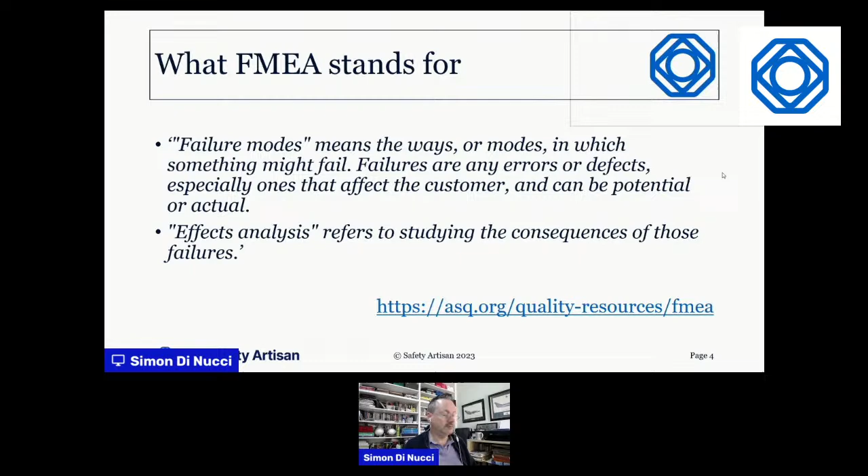So who invented it? Well, FMEA was invented by the US military, as far back as the 1940s - we have a reference for that. And it was a reliability evaluation technique. So as the name implies, it's focused on failures, which is good in some ways, but of course it has its limitations, and we'll talk about those later.

And as it says, it was one of the first systematic techniques. I've got this quote from the ASEMS toolkit from the UK MOD, and I've got a PDF of that, which you can go and look in the toolkit. There's lots of good stuff in there for free, but I've got a PDF download for you as well, which I'll share with everyone who's attended. I'll email that to you after the event.

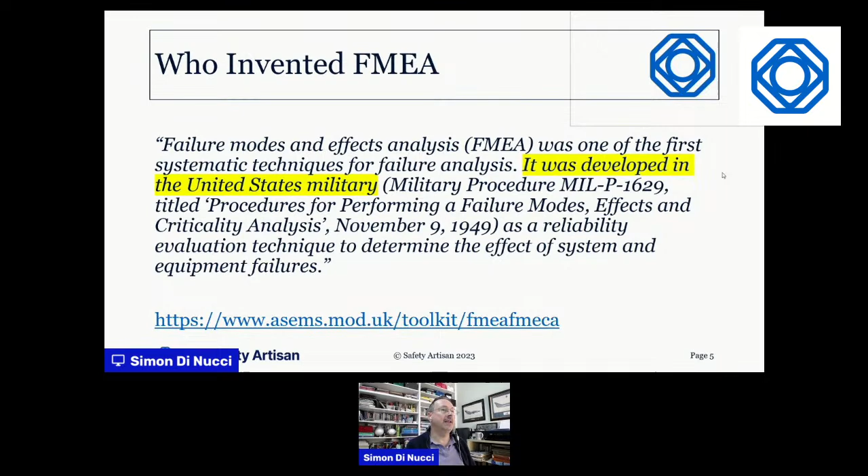So what can FMEA be used for? So as I've said already, we can use it for looking at how do we get rid of process failures or product failures - or not necessarily how do we get rid of them, but maybe how do we mitigate them or prevent them from becoming an undesirable event. So we recognize we're never going to have perfect reliability. Some failures are inevitable, but maybe we can design or architect the system so that as few of those failures as possible actually become significant, as in interrupting the operation or the mission, or causing a safety problem. And as a safety engineer, I'm particularly interested in that.

And as it says, again this is a quote, FMEA is effective for both. We can apply it to an old system - maybe we've got an existing system and we've had some unexpected failures or unexpected problems, and we want to understand why that's happening. Or we're using it for a new system in development. We'll talk about that more in a moment.

As it says, for new processes, it can identify not just failures, but usability problems, potential bottlenecks, or unintended consequences. This quote was actually taken from a medical-focused publication, because FMEA seems to have been adopted by the medical profession quite widely. It seems to be very, very popular. So it's being very widely used.

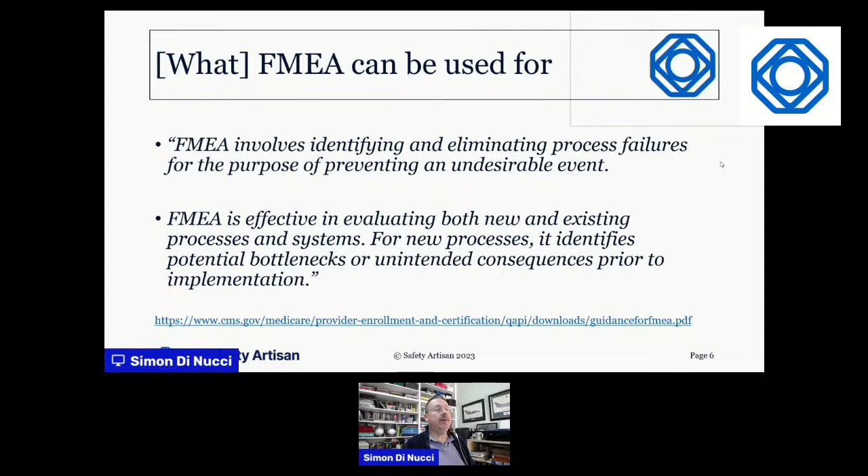So when should we apply FMEA? Here's an example in the green cloud over on the right-hand side of the V. This is taken from ARP 4754A, which is an aviation safety standard.

And here they are suggesting that we can use FMEA or FMES. FMES is a failure modes effects summary. FMES is a variation on a FMEA for a very complex system like an aeroplane.

On a commercial aeroplane, or an airline or something like that, we're going to have tens of thousands of components. So our FMEAs on each system or subsystem could easily run to hundreds of pages. Generating and reviewing a FMEA of hundreds of pages is tedious, as you would expect. So very often when we have such voluminous results, we'll have the raw results, and then boil them down.

Maybe to a summary that does some trend analysis and pulls together only the significant failures above a certain threshold that we're interested in, or maybe failures within a safety critical functional chain, something like that. That's the purpose of a FMES, in order to make the information more manageable, because the sheer volume is a problem with FMEA.

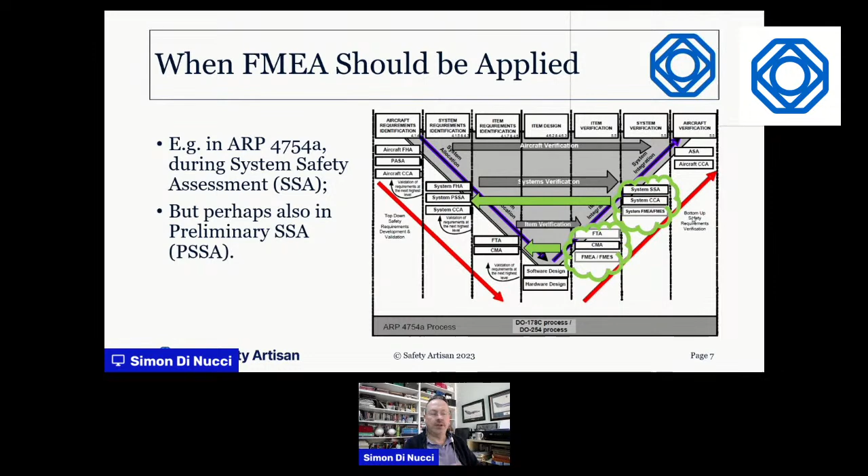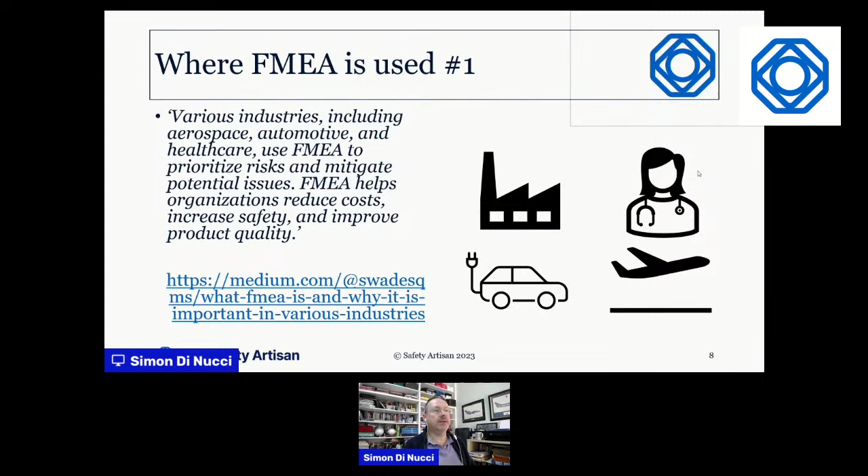So where FMEA is used, and I've got a number 1 on this because there's two meanings to this question in my view. So in terms of where it's used in industry, all over the place. As we've seen, there's lots of benefits for FMEA, and it's used in automotive, healthcare, aviation, basically anywhere where the consequences of failure can be unpleasant for people, harmful to people, or expensive. So anywhere where it's worth spending a little bit of money to understand what our failure modes are and what to do about them.

The other meaning of where I think that is helpful is what do we do with the data? Specifically here, what do we do with the results of an FMEA in a system safety program? Typically we would use the FMEA to directly do the analysis to help us come up with hazards and controls. We can just take the tabulated data and identify hazards and failure modes that need to be managed, therefore we've identified some hazard controls. That's fantastic, we can do that.

We can also use it as just one component of a wider system safety program. In this case, on the illustration on the left, we might use the FMEA to generate the data that goes in at the bottom end of a fault tree analysis. We're generating all of these failure modes, and then putting them together in order to see how they might combine to lead to a top event. The top event might be an overall system failure, or it might be a hazard, depending on whether we're looking at reliability or safety. So we would use the FMEA generated data to feed our fault tree, and indeed to help us construct our fault tree.

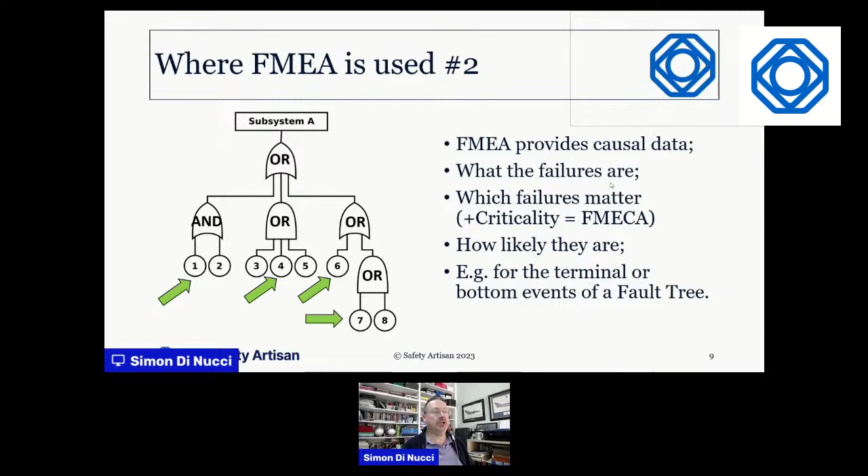So why is FMEA important? I think we probably covered this already, we've talked about the benefits. In fact you've seen this quote a few slides back. There are lots of benefits potentially from using FMEA. It's quite a simple analysis, basically, and it's quite easy to understand. It's widely used and understood. You get some nice tabular output that is relatively easy to understand and review. So there's lots and lots of benefits, and it can do significant things for us.

On the right-hand side here on the slide, we've got a slight variation. Some forms of FMEA, you can come up with what's called an RPN, where we can prioritize these failure modes and score them on severity, how likely they are to occur or how frequently they occur, and can we detect them or not, can we do anything about them? Clearly, if we've got a failure mode that could have a severe outcome, if it happens often and it's difficult to detect, well that's really bad news, and we need to prioritize that and look at that in far more depth. So something like an RPN gives us a consistent scoring system in order to prioritize things.

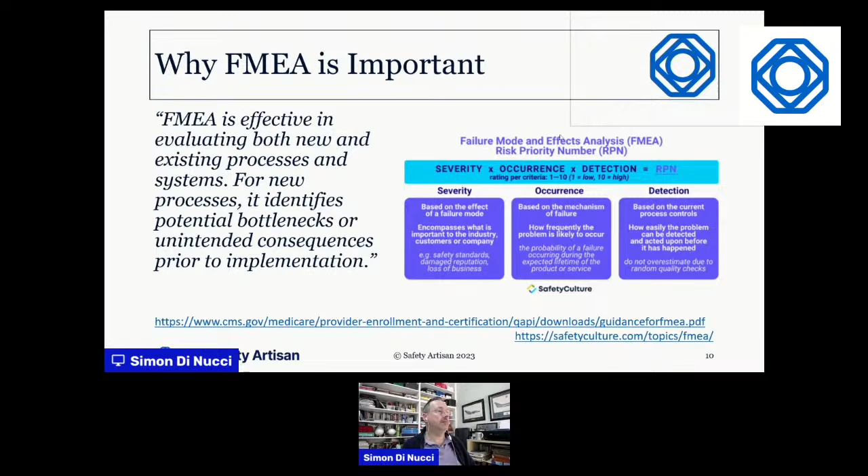So, FMEA tools. Basically I went on the web and looked up some that seem to be very popular and recommended by different people. I have not used these tools, so I'm not making a recommendation. I'm just pointing out there are a lot of tools out there.

Significant, I think, to say: there's lots of variations in FMEA. Think about what you're trying to achieve and therefore what kind of FMEA, FMECA, or FFA you want to do, and then see whether the tool meets your requirements. So lots of decisions to be made about what kind of FMEA you will do, at what level, how much detail you want to go into, or maybe you have to because the regulator says you do.

So maybe the regulator has made some of those decisions for you, but for most of us, we actually need to think about what we're going to do and pick a tool that supports our chosen process. So the tool really is the last choice.

Now, what I would say on making all of these decisions: there are lots and lots of very good free guides and templates out there for different kinds of FMEA. We'll see an example in a minute. I've chosen quite a simple one. There's a slightly more sophisticated example in the PDF handout, but there's lots of other stuff out there, and if you follow some of the links I've provided, you'll see them.

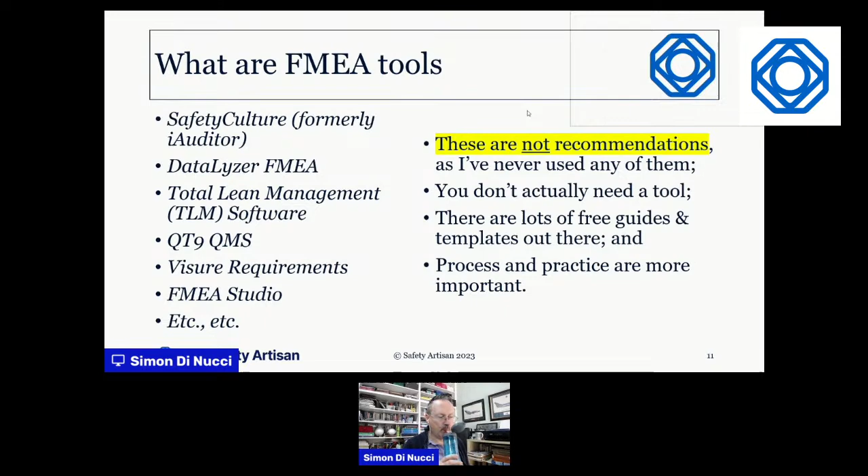Okay, so those were all the topics I wanted to cover.

In order to go through that stuff, I've been on these sites, quality sites, Medicare, Safety Culture. There's lots of good information there. As you'll see, for example, on the third one down, there's a guidance PDF on that site at the cms.gov site. So that's good.

I'm also going to be emailing you the PDF for the ASEMS Toolkit Guide, so if you prefer to read information in that format, I will send that to you. It's also got some further links to standards, so if you want to follow a particular standard, there are some examples there. There's lots out there, different industries apply different standards, so it's just a short list, not exhaustive.

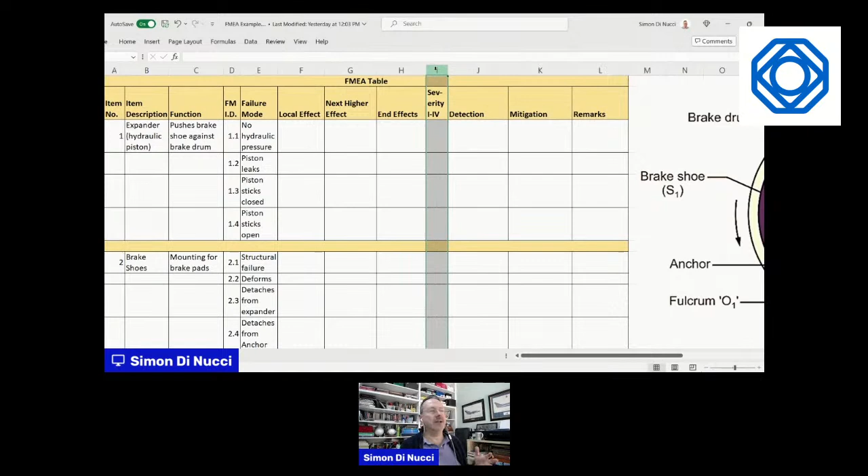Now, strictly speaking, this is actually a FMECA table, because on this table we can assign a severity, and in this case severity 1 is we could hurt somebody, or it's critical or catastrophic, and severity 4 is no effect whatsoever. Okay, I'm not going to bother filling that in. Well, we might do. We'll see how we go.

And then we've got some additional columns here. So in fact, we could do an FMEA with just columns A to F. Okay, that would be a very, very simple FMEA. And then we are maybe adding the criticality considerations here in columns G to I. And then finally, when we talk about detection and mitigation, we are anticipating some controls here.

Either from a perspective of reliability or safety - I'm going to focus on safety. And then remarks, maybe we're going to put some amplifying remarks in there. Or if we've got a bunch of people, we might allocate an action to an individual in that column. So there is our table, and I've got just a couple of examples.

So what we're looking at, and it is a very simple example, quite deliberately. Now, why is that? I don't know if you're seeing a hole in your diagram as I am. I don't know why that's happened. Never mind. So here we've got a very old-fashioned drum brake, and for those of you who aren't as old as I am, a drum brake is an old-fashioned braking system. Almost everybody uses discs these days, except on bicycles. Well, even they use discs.

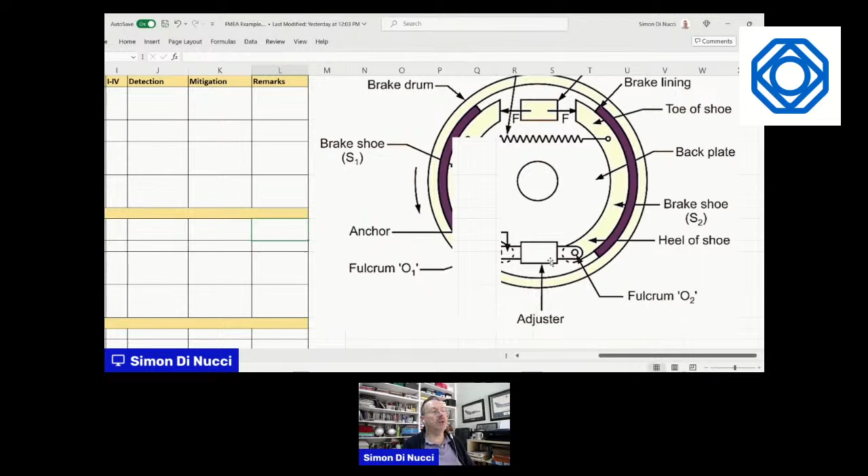So that decelerates the car. By squeezing the brake shoes and the brake linings onto the drum, we get friction and we get deceleration. Okay, so the shoes are forced apart by the expander at the top. The shoes pivot at the bottom on the fulcrum there, which we can adjust. So if we've got brake wear, we can adjust the shoes to make sure that they make good contact. Okay, so there's an anchorage point down here.

That is basically a brake drum. It's very simple. And then finally, the retractor spring. When we release the pressure on the brake shoe, when the piston contracts again, the return spring just makes sure that the shoes come off the brake drum and the braking effect ceases. And that is basically the operation of a brake.

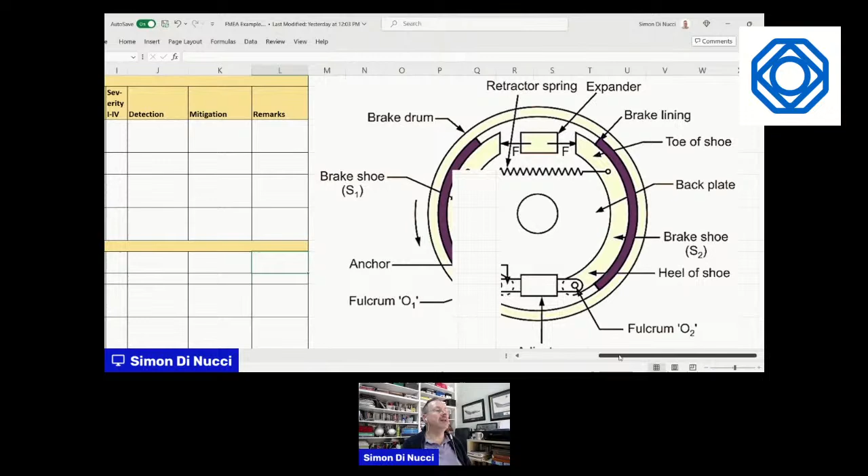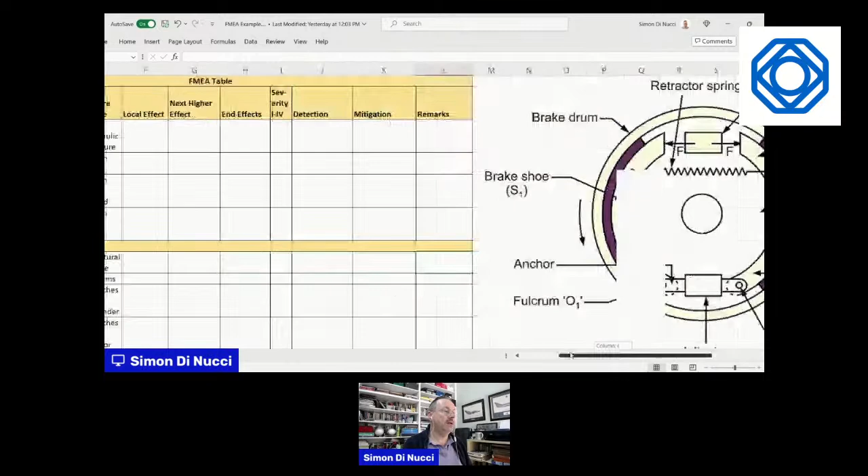So I'm going to go through this in front of you. Okay, so first of all, we've got our expander, our hydraulic piston up here. So what happens if - the function of it is to push the brake shoe against the brake drum. So our first failure mode is no hydraulic pressure. So we're not getting any pressure to the expander. So the immediate effect would be...

No expansion. Oops - this is where you discover that I can't spell or add up while people are looking at me. So no expansion, let's say, of brake shoes. So actually, maybe just say no movement.

Okay, so by the way, it's perfectly normal as we go through this stuff - the reason I'm doing this live, I haven't, as you'll see, rehearsed this particularly well. It's okay to make mistakes. It's okay to go through, and then sometimes you'll get partway through and you'll suddenly think, oh, I've misdescribed the function, or I've got the failure mode slightly wrong. So as you go through this, you will refine your assumptions, okay? And you realize you hadn't understood things as precisely as you could.

So no movement of brake shoes means no pressure against brake drum.

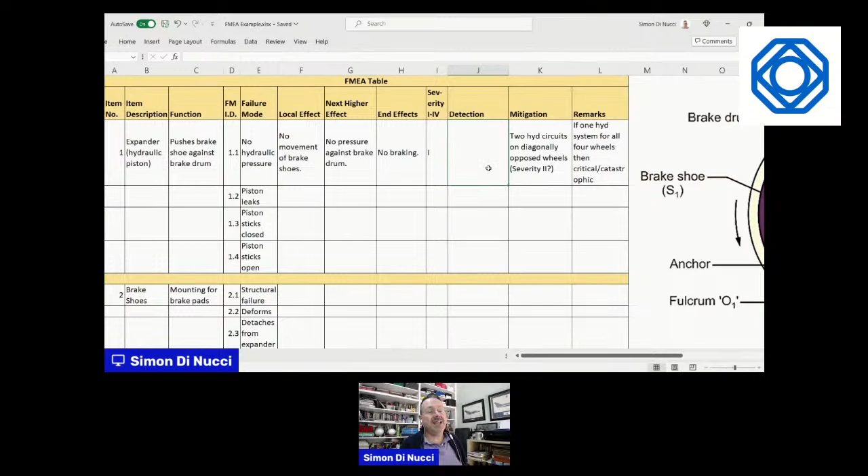And what's the detection? Okay, so maybe if we've got a pressure sensor in the hydraulic circuit, it triggers a warning light to the driver saying your brakes have failed, or half your brakes have failed. Okay, so there we go - there's just one line, and we've actually not only looked at the failure, we've come up with some really useful information. I know it's a very simple example and it's very old tech.

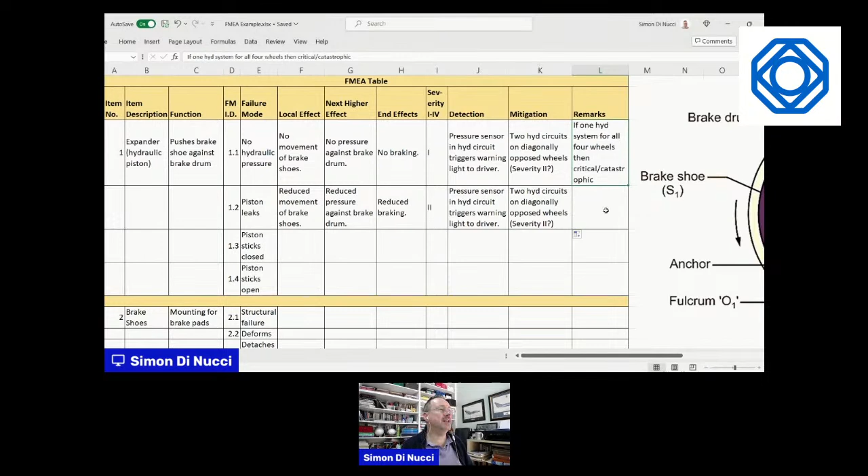Again, if we've got two circuits, okay, maybe that remarks thing from the 'no' isn't as relevant, but it might be. So we're beginning to see here already how repetitive these things can be, which makes it easier to fill in the table quickly. But of course, if we go too quickly, then we can make mistakes, particularly when you're talking about huge tables of data, which maybe you've worked on over a long period of time.

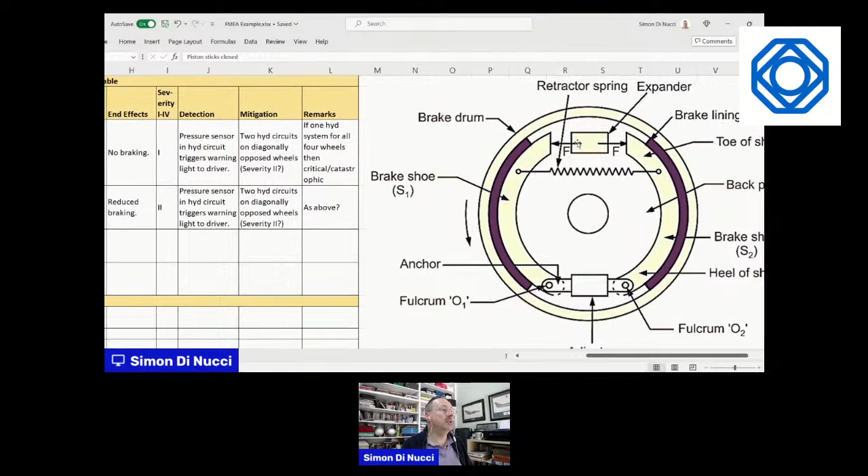Piston sticks closed. Okay, so that means that the piston, the expander, is not going to move at all - it's not going to expand the brakes, which means no braking. Okay, so let's just copy all of that for now, because we've got no braking at all.

So let's just check this - no movement against brake, no pressure against brake drum, no braking. Okay, agreed, category 1. Now, hold on, but it's only one piston.

If it's just one failure, we've still got - so one piston per wheel. So there's an assumption there that I'm making. So we've still got 3 out of 4 brakes working. Although we are going to get a bit of swerving though, aren't we?

So maybe that is category 2 again. So, yes, swerving while braking - we might have that. So pressure sensor isn't going to do anything for us in this case. So maybe something more sophisticated that can tell that the piston hasn't moved.

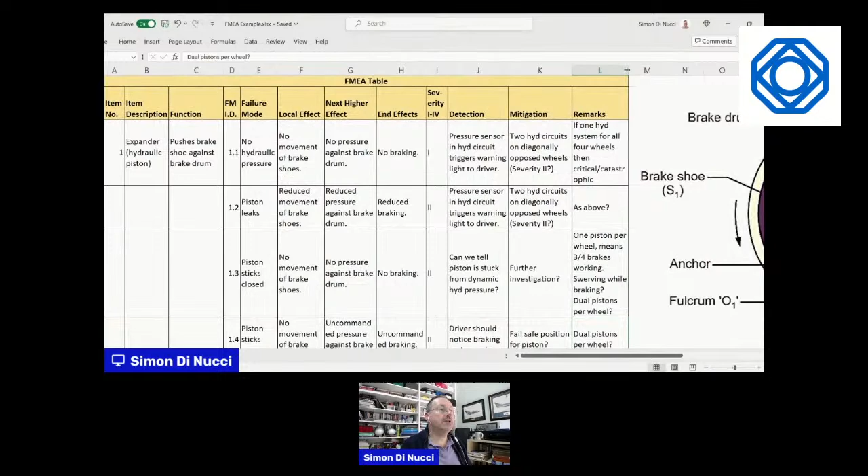And in actual fact, dual pistons per wheel, we could have that for the one above too, couldn't we? So I will just add that. I'm just going to adjust this slightly. So here we go.

We've done just one component, the brake piston or expander. And what's that taken, 10, 15 minutes, if that. And we've learned quite a lot. We've come up with quite a lot of ideas for detection and mitigation, albeit, we're familiar with cars, so we're probably aware of all these things already, but it's an artificially simple example. So we can see how powerful this approach is.

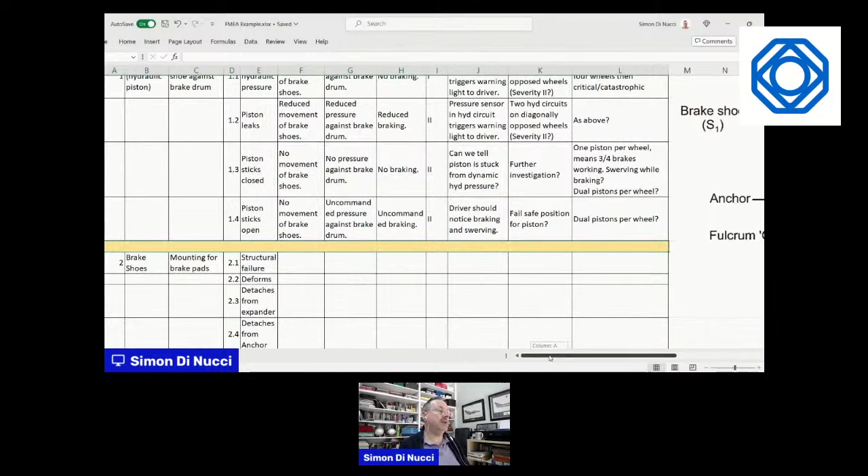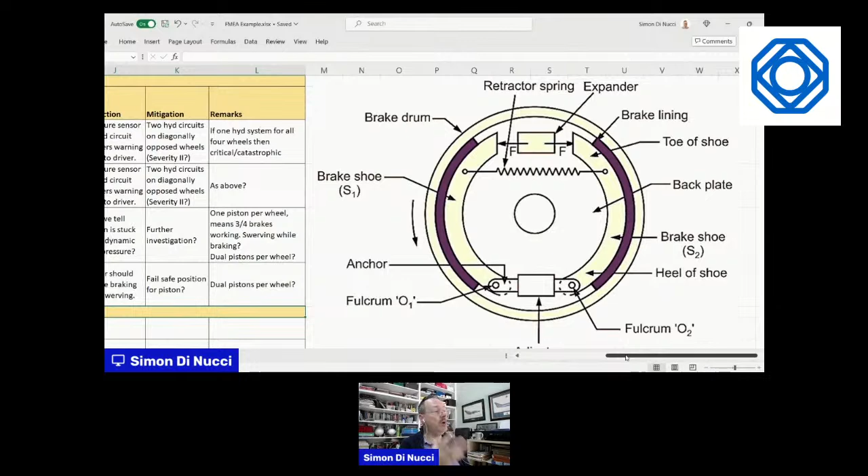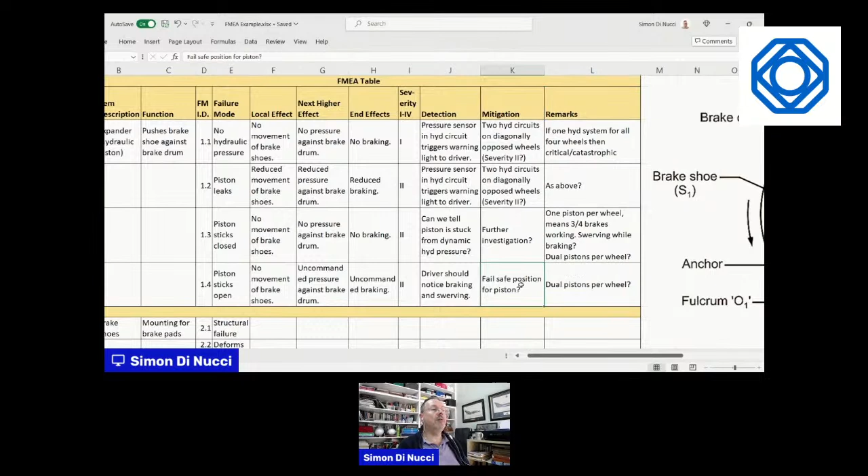We could go through all of this for the brake shoes, for every component in the brakes. And we can not only understand the failures at this level, at the level of the brake or the wheel, we can appreciate the effects at a higher level, and also what we might do about it at an architecture level above the level of the wheel brake itself. So we've got quite a powerful technique here for getting results quite quickly.

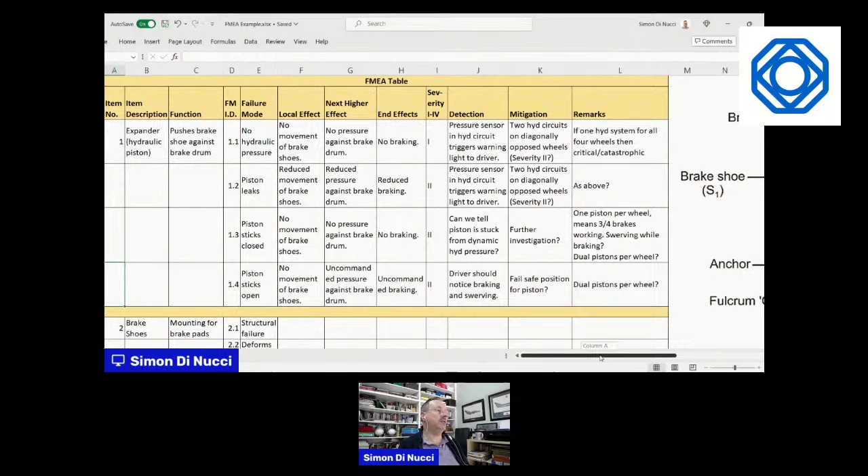As we've said before, we can apply these techniques to lots of different things, to processes. We could have a process flow diagram here, etc. Mind you, if we've got a process flow diagram, you could argue we should be using a HAZOP, but that's for another day. Okay, so I'm just going to stop sharing and go back and see, have we got any additional questions?

Thank you, Matthew. Is there merit in performing a root cause analysis? That, I would suggest, depends on the complexity of our system. The simple one we've done there, yes, it's relatively easy for us to work out what's going on. And indeed, we could do a simple FMEA on the hoof and help us understand the architecture. But if you've got a much more complex system that's already designed, then you might well need to do some analysis to understand what you've got before you can construct your FMEA table. Whether that's root cause, or maybe you break your complex system down to subsystems and ask what function does it provide, then we're getting more into FFA. So sorry, I can't give you a hard and fast answer, Matthew, it all depends on what we're doing. I don't think I've ever done root cause analysis before FMEA, but that doesn't mean it hasn't been done in results that I've reviewed.